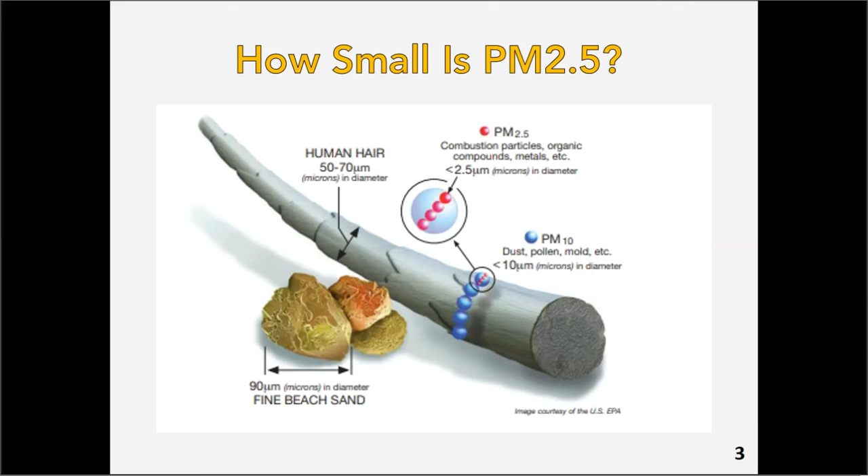Because they're collecting health-related information, that information is considered public. And at some point, it has to be reported to the federal government. Now, I could point you to websites where you can go get that data yourself and take a look and probably fall asleep because it's just numbers.

But the kind folks at the American Lung Association have taken upon themselves to, on an annual basis, tabulate the data in such a way that it makes it easy to see where the problems are. So what they do is they take a look at all the data across the country, and they look specifically at the top 300 metropolitan areas across the country. And each of those areas has air monitoring sites. And every time one of those air monitoring sites gets a reading of a substance that we know is harmful, at a level that we know is bad, that location gets a tick mark. And the more tick marks a location gets, the higher up on the lists that they create it goes.

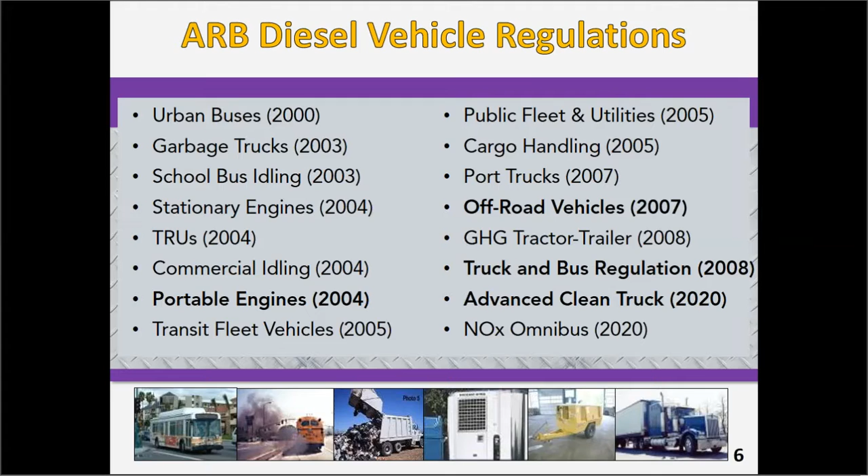Let's get into the main thrust of the first regulation, the truck and bus. And this is, in my opinion, completely time sensitive. We are in the middle of reporting season for the truck and bus regulation. So hopefully some of you are here this afternoon because you want to know more about what you have to report if you're going to report. The truck and bus regulation is what's called an omnibus rule, which means that there were many other rules that were put in place prior to this one that covered different types of use of diesel engines and vehicles.

And the truck and bus regulation was actually created to kind of encapsulate anything that didn't fit into one of the other rules. So it kind of overarchingly covered anything that wasn't already covered. That's why we call it an omnibus rule.

So to understand whether or not it applies to you, you first of all have to be a private or a federal fleet with one or more vehicles. Even one vehicle is considered under this regulation. That's considered a fleet. If you operate that vehicle in California and it runs on any form of diesel fuel and has a gross vehicle weight rating of more than 14,000 pounds, you are most likely in this regulation.

Public and private school buses also fall under this regulation, although they have very specific requirements that we're not going to cover in this afternoon's class. So if you have questions about those, please let me know, or Katie, and we'll get that information for you. The same could be true or said of two-engine street sweepers. By default, they were put into this regulation, even though the nature of that type of vehicle sometimes should put it in a different one. But they're in here. And private utilities.

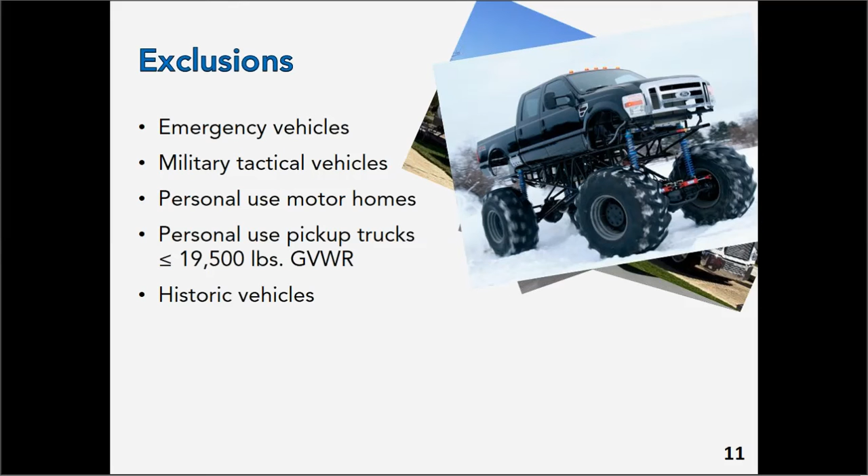And finally, vehicles that are subject to any other in-use regulations. So one of the rules that was on that list that I showed you a few moments ago was the drayage truck regulation. That would be any truck that hauls containers in and out of ports or rail yards. And because they're hauling containers, they fall under a rule that's specific to drayage trucks, because that's what a drayage truck is defined as. So because they're under that regulation, they're not covered by this one. So they're exempt from this one, at least for the time being, but it doesn't mean they're not regulated.

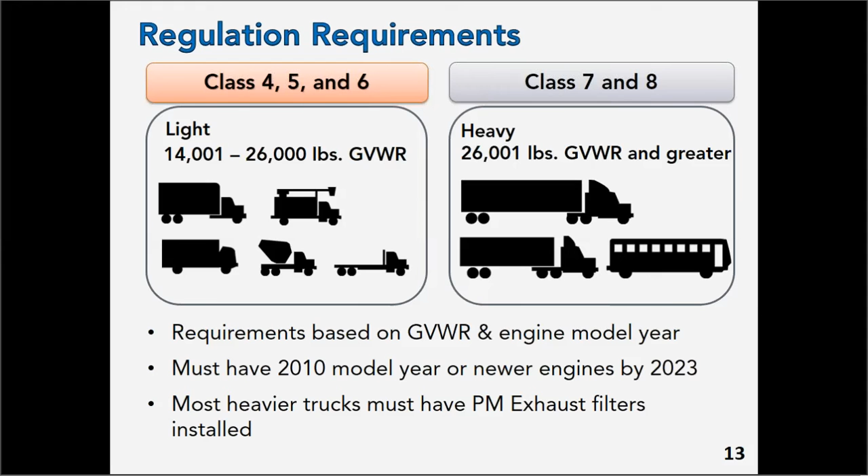A light truck, if you want to go with industry standards, is a class 4, 5, or 6 truck. It's anything that weighs at least 14,001 pounds, but no more than 26,000 pounds. These are your simple box trucks or other type trucks that just aren't giant vehicles. And then the heavy trucks are all the full size, the big semi-tractor rigs that are going to pull trailers, and buses and things like that. Anything over 26,000 pounds. You have to know which size your vehicle is before I can tell you what your requirement is.

The other number that you're going to need to find is also the model year of the engine. The reason we want the model year of the engine is because all engines are certified for sale in the United States by the federal EPA. And on-road engines are certified by model year. So that is how this rule was written, by model year. All the requirements are based on the weight of the truck and what the model year of the engine is. Don't rely upon the model year of the truck, because generally that is going to be the chassis model year and not necessarily the engine's model year.

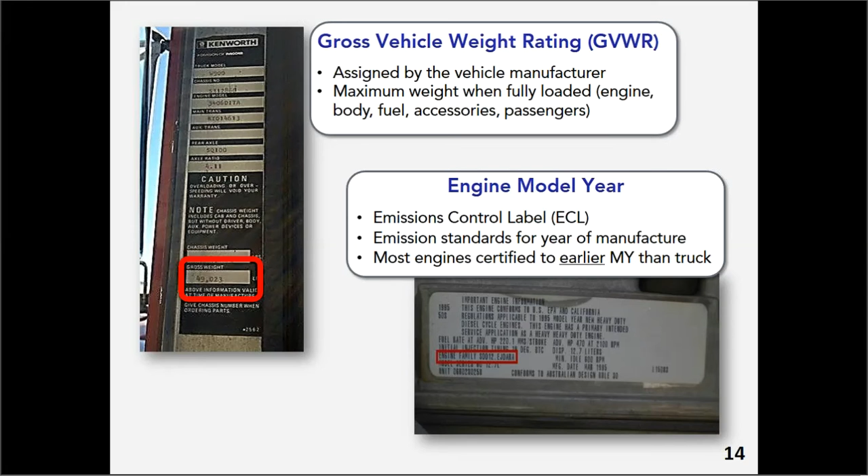Now, since we have the weight class and we have the model year of the engine, I can now tell you what your requirement is. So we'll start with the light vehicles. The light vehicles have an easier to read way to determine what your requirement is, because there's just one requirement. First thing you have to do is find your model year engine. On the left-hand side of this chart, this is for all light trucks, class 4, 5, and 6 under the rule. You find the model year engine on the left, and then a date on the right. That date is when that vehicle's engine has to meet 2010 model year emission standards.

That's confusing for some people because they don't know how you meet 2010 model year emission standards. Well, the only way you can meet 2010 emission standards is with a 2010 or newer engine. There is no retrofit that you can stick on an old engine to make it 2010 compliant. It has to be repowered. So if you have a vehicle in this class and you're up to the date where it has to be swapped out, you either have to repower it to get it to 2010, or retire it, or replace it, or drop it down into low use.

So all those people, perhaps some of you in the audience today, that have these light trucks with a 2004 up to and including 2006 model year engine, on January 1st of this year, you had to have a 2010 or newer engine in that thing. Otherwise, it's not legal to drive in the state of California. So that's the requirement. If you follow this chart, there is no reporting required. You don't have to put your information in our truckers reporting system. Most people do anyway, but you don't have to if you're following this chart. Okay, that was for light vehicles.

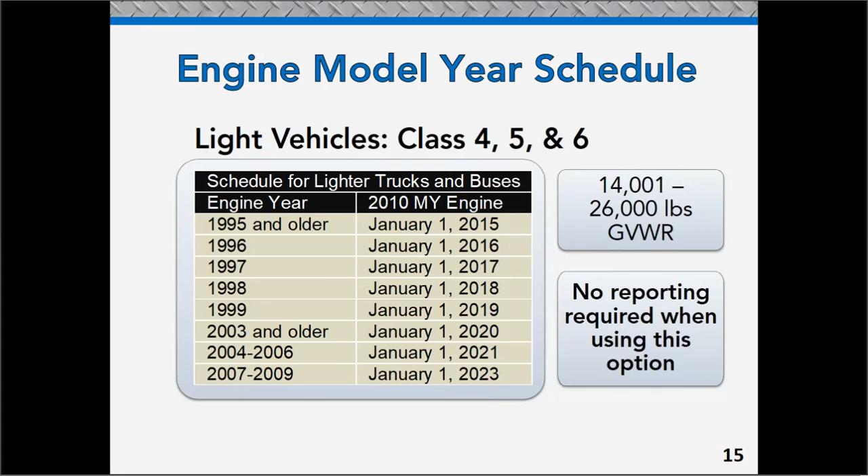Let's take a look at heavy vehicles. It's a very similar chart. There's only one difference, and it's a major difference. In the middle of this chart, there was a requirement to also have a diesel particulate filter installed by a particular date, depending on the model year of your engine. So let's use that same class, the 2000 to 2004 engine model year. If you had a heavy vehicle over 26,000 pounds, class 7 or 8, that had a 2002 engine in it, you were supposed to legally have a filtration system installed by January 1st, 2013, in order to be legal to operate until January 1st of this year.

And then January 1st of this year, even if you had the filter, that engine still has to meet 2010 emission standards. And again, the only way to do that is to repower. So the filter doesn't do you any good by itself. It has to be repowered. If you meet the terms of this regulation, again, there's no reporting required.

For most people, that end date on the right is going to mean one of two things. You're either dropping the vehicle down to a low-use exemption, again, which we'll talk about more later, or you're retiring the vehicle, somehow just getting rid of the vehicle. The repower option is available. Most dealerships will do that service, but it's also an extremely expensive service, and it would probably cost more to do than the engine is actually worth.

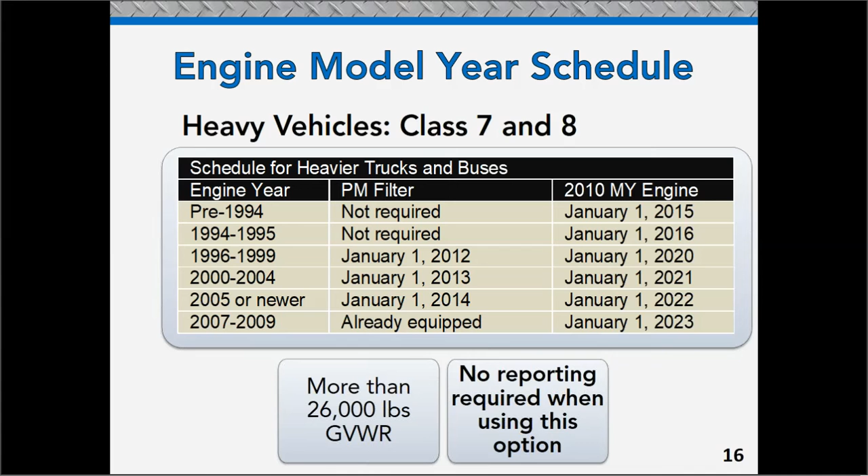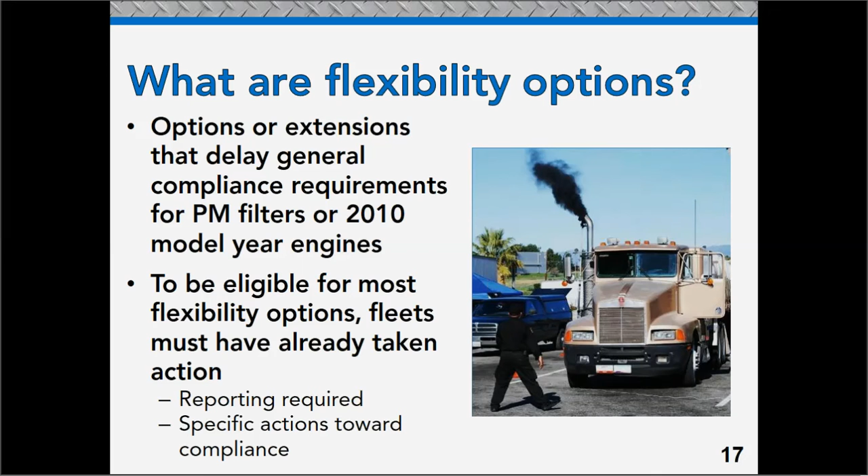Okay, so let's take a look at what's next here. This rule has had a few what are called flexibility options. I hesitate to go too deep into this because most of them are not in existence anymore. We're almost to the point where this rule is fully implemented, but along the way we did have ways for people to basically step outside the boxes I just showed you. They were flexibilities that allowed you to operate longer without filters or longer without converting the engine to 2010 if you met certain conditions.

Now, like I said, most of those have already passed, but we did have a little bit of a hiccup. Back in 2014, under duress from the public and our legislature, the Air Resources Board actually modified the truck and bus rule, and we added some flexibilities. We extended some flexibilities, and we gave people more time and more options. And immediately after we promulgated these changes, we were sued by a company called Lawson Trucking.

Now, Lawson Trucking, in conjunction with the California Trucking Association, filed a lawsuit saying that the changes created an unfair business advantage to the people who didn't have to update their vehicles. And basically the argument was Lawson and CTA's members had already purchased new vehicles, had already put filters on, and they had paid the money to comply with our rule. And then we were giving everybody else a chance to not have to do that.

I agree with that line of thinking, but I also agreed with having the new flexibilities in the rule. But that didn't matter. We got sued and we lost the case. So all the changes that we made in 2014 actually were thrown out. And by filing another legal document contesting that lawsuit, we put off any decision until 2018. And in 2018, the administrative judge came back and told us we'd lost. So the 2014 amendments that we put in place are no more.

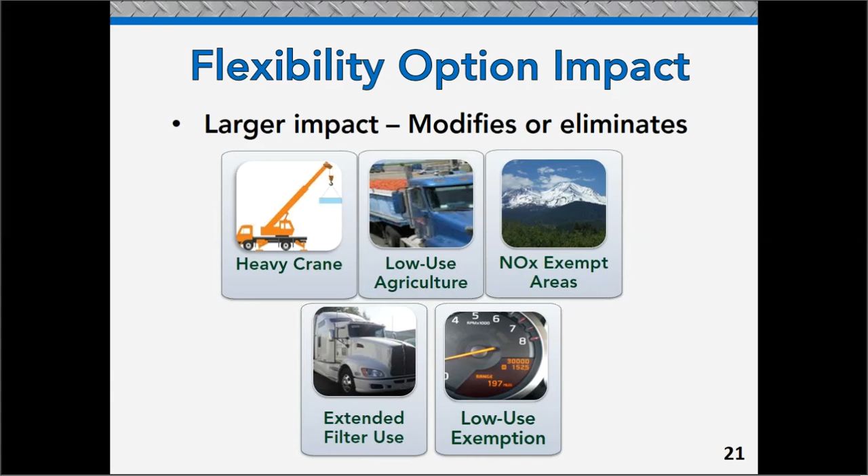For most people, that doesn't have any impact because most people who took advantage of any of the changes we made in 2014 were able to get them and use them because they were ending typically in 2018 anyway. But there are a few things that did change that caused some people a larger impact. And I'm going to talk briefly about these options because there were some changes under the lawsuit, and these options still do exist. First one is heavy cranes.

This was a flexibility option that did not exist prior to the 2014 amendments. And essentially it's for, and I didn't even know what kind of vehicles these were until I read up about this, but these are giant on-road cranes that do nothing but crane work and have to have a certified crane operator run the crane. They don't have any ability to haul cargo. They have to be more than 54,000 pounds gross weight. So these are giant pieces of equipment.

And I know some of you have seen these. If you've ever seen one of those trucks sitting out in the parking lot with a crane extension that goes up 250 feet or something like that, that's a heavy crane, and those vehicles were covered by this flexibility. And then when the lawsuit happened, the flexibility was taken away. So what we did is we installed that flexibility in another completely different regulation. It's now in the solid waste collection vehicle rule.

So the people that were under that flexibility are still following it, and technically they're not in the truck and bus rule, but for all intents and purposes, they are still following the same program. So if you do have a vehicle like this and you believe that it's a heavy crane and you don't know that you're already in the heavy crane option, you need to contact our office, because that vehicle is technically supposed to be in this regardless of whether you wanted it to be in this or not.

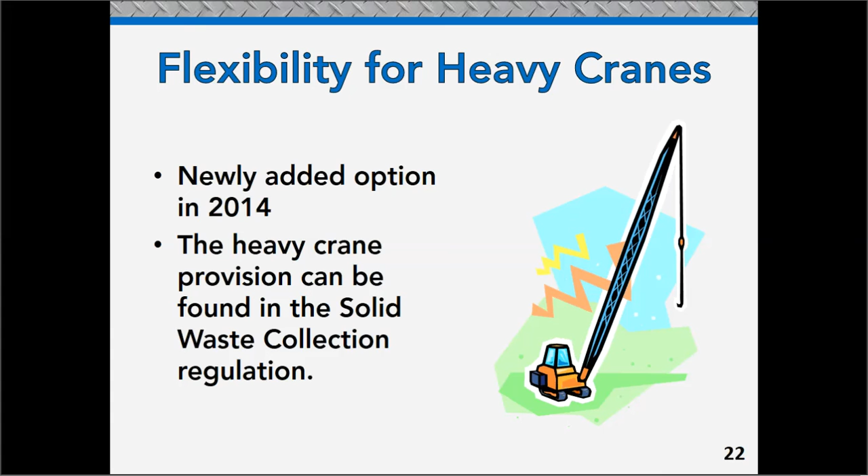Ag vehicles did have a pretty big change because of the lawsuit. When we made the amendments, we gave more mileage and time for the ag operators to run their trucks, and because of the lawsuit basically making those changes invalid, we had a situation where for 1 year, and that was 2019, anybody with trucks under the ag provision actually lost 5,000 miles of operation in 2019. Beyond that, there were no significantly big impacts unless you had cattle trucks, because cattle trucks were put under the 2014 amendments and then taken back out after the lawsuit.

For anybody that's operating ag vehicles right now, you still have the mileage limitation, you still have a reporting requirement, you still have all the options that the provision offers, but your mileage right now is no more than 10,000 miles per year per vehicle, and that ends January 1st of 2023. At that point, you could drop that vehicle down to low use, but your requirement is to ultimately replace the vehicle with one that has a 2010 or newer model year engine.

Here's one that I think is going to be around for a while, at least I hope it will be. When we were putting this rule together, one of the reasons that this rule is in place is because we're trying to meet federal guidelines on different pollutants in our air. One of the pollutants is oxides of nitrogen, which is a component of photochemical smog, or ozone. When we were looking at the data, we saw that several counties in California were actually in compliance with federal standards for NOx. So for those counties, we never really needed any improvement in NOx.

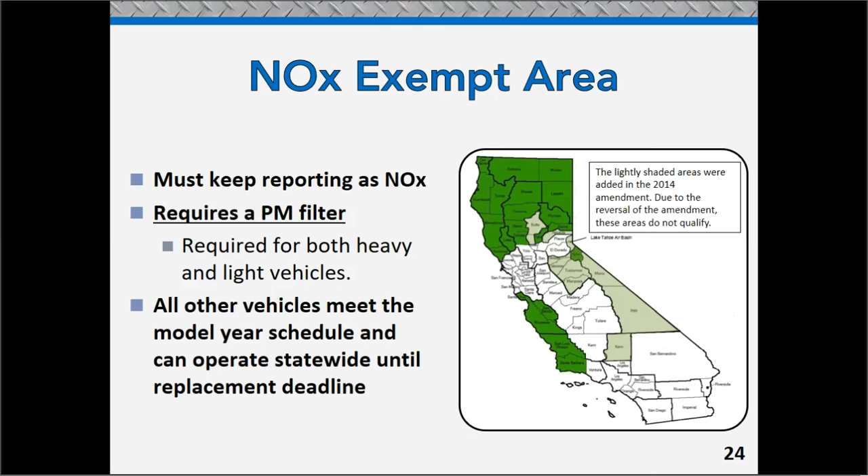But once you get that filter, you're done with having to do anything to the vehicle as long as you own it. You cannot go outside the geographic areas designated by the dark green shaded counties, and there is no mileage limitation. So it's a pretty good option if that's where you live and work. The only reason I put it in this section, and the only reason there are gray shaded counties, is because the 2014 amendments added those counties, and because of the lawsuit, they got taken back out. Anyway, this option is still available. It does not have an end date, so as long as you filter your truck and keep reporting properly, unless something else comes up, you should be able to run that vehicle for an extended period of time.

We also have an issue in the rule with trucks that have problems getting filtration, or trucks that were filtered by a specific date. So there were two things happening here. One was that in the original writing of the rule, we stipulated that any fleet that filtered all of their trucks by January 1st of 2014, we were going to give an extension to all those trucks until 2023. So there's still some of those around.

When we rewrote the rule in 2014, we took away the requirement that it had to be all of your fleet. And again, the lawsuit brought that back. So that's still in the rule. If you are an owner-operator and you own the truck that you had back in 2014 and you put a filter on it, then you should qualify for this extension regardless of the model year of the engine.

You just need to make sure you get a hold of our TRUCRS staff and provide them with the proof that all that's true. The other part of this extended use of filters, or this filter issue, is that there was a provision in the rule that called for a manufacturer's delay, and it's still there.

I don't know why too many people would be putting filters on unless they're doing the low NOx thing, but if you are in the market for putting a filter on and you're worried about meeting the terms of this regulation, what I would suggest that you do is get in process of the installation of the filter by September 1st of the year before you're required to have it.

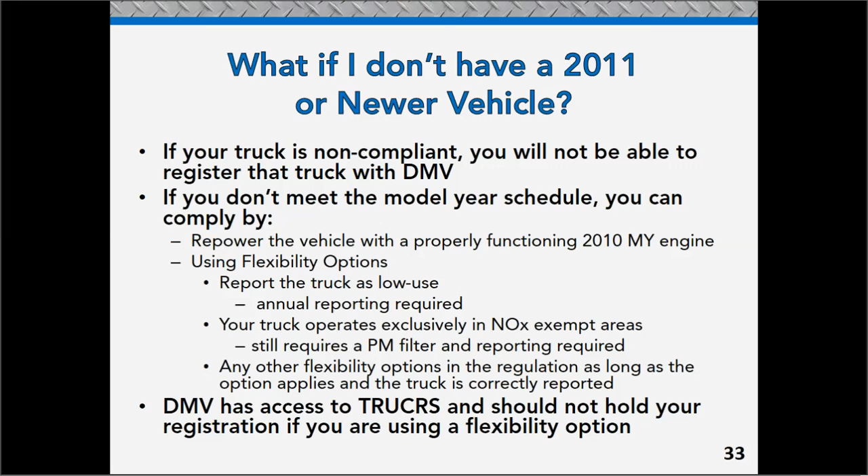Oh, by the way, if you have a vehicle that is 2011 or newer, you're not going to have a problem with this whole SB1 thing, at least not for the time being, because the DMV database will recognize that 2011 or newer truck as having a 2010 or newer engine. And as a consequence, they should not send you notifications that you have a registration issue.

If you do think you have issues, though, we do have some contact information. There's an email and a hotline that you can call. We've got people on call every day during the week who will answer your questions and try and connect you with somebody that can actually work out the issues that you're dealing with.

We also have webpage information for you if you have the desire to go look at more information about each particular regulation. This happens to be the truck and bus regulation webpage, and there's lots of links with lots of information, fact sheets, resources, regulatory documents, all kinds of good stuff. All right, that was the truck and bus rule and the SB1.

Let's talk about PSIP, or Periodic Smoke Inspection Program. First thing you need to be aware of with this is that it is a completely separate rule from any of the other ones. It's been in place for longer than pretty much any diesel on-road truck rule that we have. It was first put in place back in 1998, and it's also what's called an in-use rule.

So briefly to explain that, the truck and bus rule essentially says your model year of this truck has to have this. But the truck and bus rule doesn't say anything about the emissions of the vehicle going forward after you meet the basic terms of compliance. So you've put a filter on the truck, or you have a 2010 engine. What if you're the kind of person that doesn't take care of your vehicles and those engines wind up spewing out a bunch of pollution?

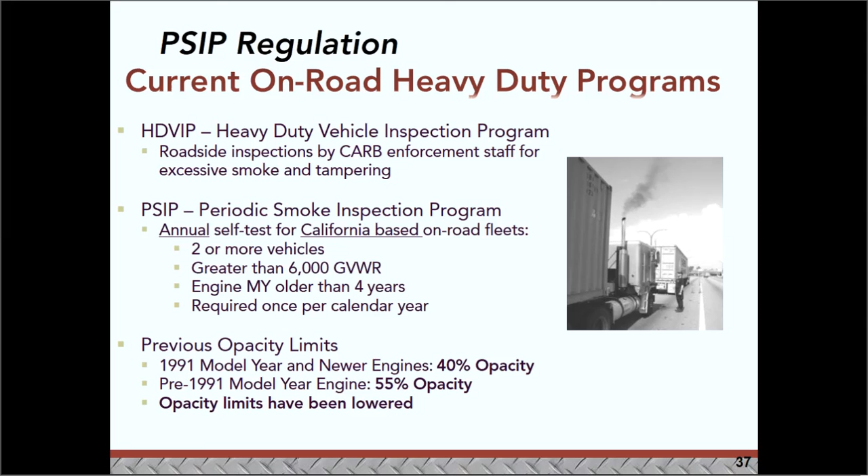But it's simply what's called an opacity test. And opacity is a measurement of the level of black smoke coming from the exhaust. The more black smoke, the higher the opacity. Now, you may be wondering why I'm talking about it now. Well, because this rule's been around so long that when we originally put it in place, we had engines that were putting out a lot of pollution. It was before filtration systems were actually available for most engines, and the opacity levels allowed under the old rule were significantly high. You can see them right there.

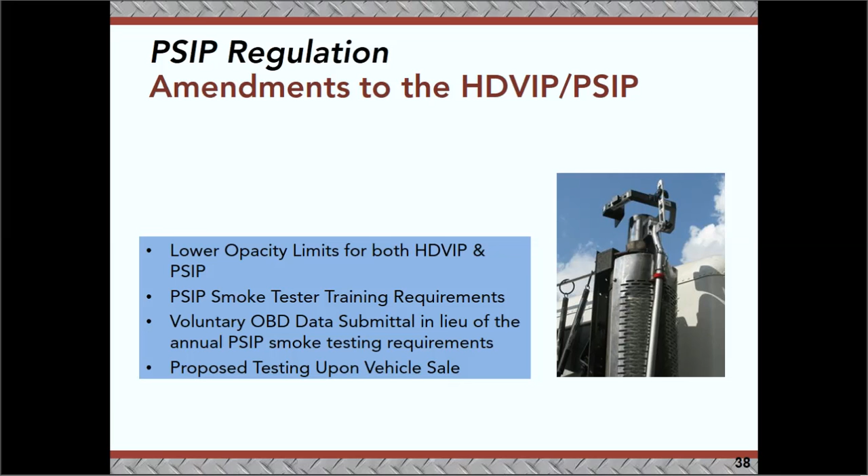We had to lower the opacity levels that were required by this regulation because of the advent of filtration systems. Diesel particulate filters should remove 99.9% of all the soot coming from diesel engines, and so the 40 and 55% opacities just didn't make sense anymore. So we lowered those. While we were getting into the rule, we also added smoke tester training requirements that were not in there before, and created a voluntary program, which I'll talk about in just a moment.

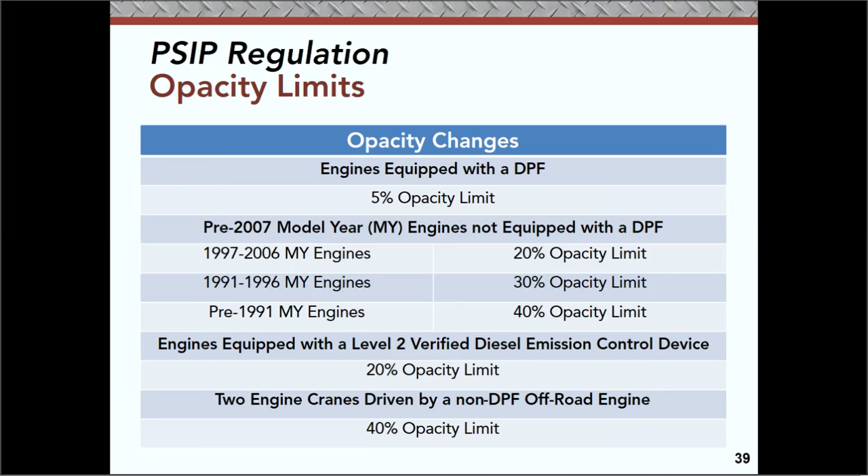So the new opacity levels that are set by this law are shown here. The basic one is this. If you're required to do this test and you test one of your vehicles, the opacity has to be no more than 5% or the vehicle fails, if that vehicle has a filter. If it doesn't have a filter, and that could be your low-use vehicles or ag vehicles that wouldn't necessarily have a filter on them yet or at all, there are still lower opacity levels than there were under the previous regulation, and they're based on the model year of the engine that you have. There are also some specialized pieces of equipment listed here that have trouble getting down to the low opacity level, so they're given a higher level as well.

As far as the training requirements are concerned, there's really two types of people that can conduct this test. One is the owner of the vehicle, if they have the proper equipment to do the test, and the other would be somebody that you hire who has equipment to do the test. If you hire somebody, that smoke tester is required to attend a training class that's held at community colleges throughout the state of California that are part of something called the CDET program. CDET is essentially community colleges that have diesel mechanic schools, and there are 8 of them certified to provide this training. I think there's 1 in Sacramento, 1 in Stockton, 2 in the Bay Area, 2 in the Los Angeles area, and 2 in the San Diego area.

In any case, that person who's charging you to conduct the test is required to have attended a 1-day certification class to actually do that test. With COVID concerns, they have moved that to online training, but they still have to have the training once every 4 years. So if I'm hiring somebody to do this test for me, I'm going to ask them for the certificate from the CDET program and make sure that it is not more than 4 years old. If it is, or they don't have it, it's an invalid test regardless of what kind of equipment they have. So that was one person that can do the test.

The other person that can do the test is either the owner of the truck or somebody that works for their fleet. We're not requiring that person to go to the CDET training program, but there is now an online training class that anybody conducting a test on their own vehicles or their own fleet is required to have taken. It is a couple hours. It's online. It's menu driven. You watch these little videos, you answer some questions, and as long as you get a 70% or better through all the modules, you pass, and you will be sent a certificate as well as a tester number that has to be entered into the testing device.

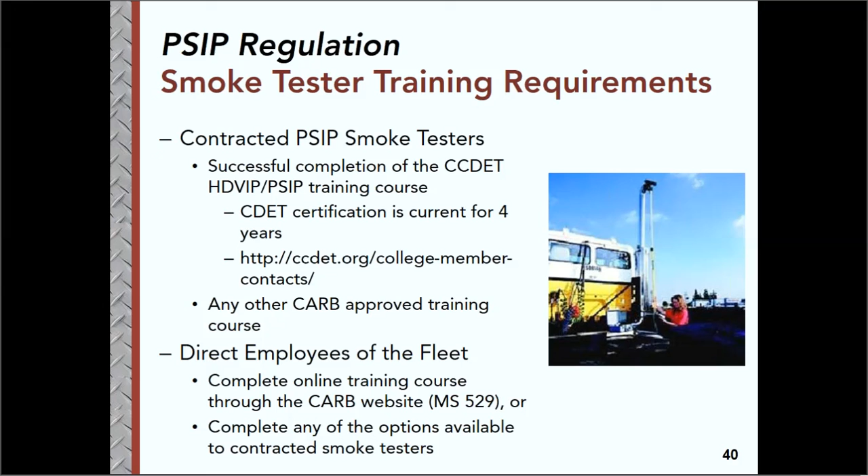The record keeping and reporting requirements really haven't changed, especially the record keeping requirements. It's always been you have to retain records of these opacity tests for 2 years. And as long as you do that, we don't have a reporting system for those opacity records. The only time that ARB personnel want to see them is if we're auditing your

fleet for some reason. So if we're auditing your fleet to try and get you into the truck and bus rule as a low-use vehicle or ag vehicle or whatever the case is, then we're probably going to ask you for current opacity readings. If you're under audit from our enforcement division, they're going to want to see 2 years worth of opacity readings for the vehicles that are in the fleets, and that's what it was before.

We did add an additional voluntary choice for people who have newer vehicles. So anybody that has trucks that fall under this rule where the engines are 2013 model year and newer, those vehicles are equipped with something called onboard diagnostics, or OBD. Basically, it's the computer system that your vehicles have run on for a long time, except now it's in the heavy-duty vehicle class. These vehicles are capable of having smog inspections done to them because there's a little dongle underneath the steering column that the computer can attach to.

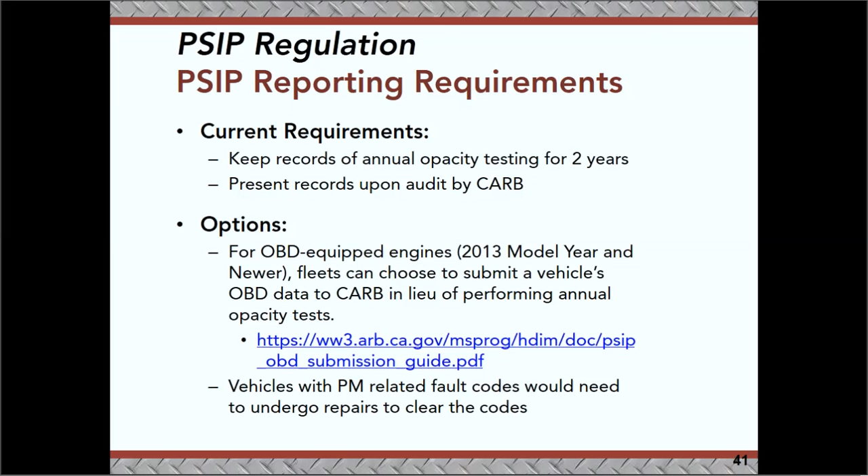I also need to let you know that we're in the process of putting together a new type of smog inspection. So right now it's actually passed, but we're working on the details of how to actually do what's called an inspection and maintenance program on heavy-duty diesel vehicles. If you don't know what inspection and maintenance means, the quick and dirty for that is smog check. Right now you have an inspection and maintenance program for your gasoline vehicles throughout the state of California. That is a smog check.

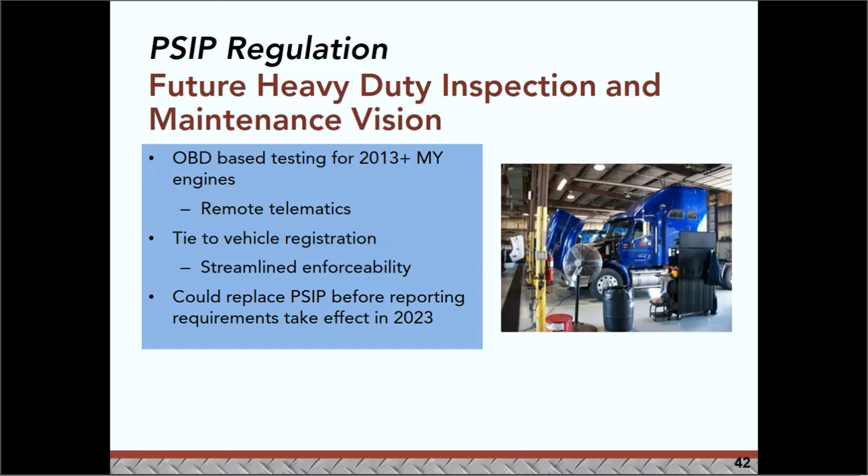There will be one in short order for diesel vehicles. It should be fully instituted sometime in 2023. So look for that to happen. And when that happens, the PSIP test is probably going to go away for most people because you're going to be part of this new I/M program.

All right. So before I turn this over to Katie, I do want to talk about the newest stuff. Everything I've hit so far has been part of the older style of regulations, all dealing with combustion vehicles and combustion technology. In the state of California, as I showed you very early, we have such a problem with pollutants. We are transitioning to mostly electric or hybrid electric or zero emission type vehicles. In that vein, we have actually passed 2 different regulations already that are going that direction.

The first was something called the Advanced Clean Trucks, and it was more of a regulation to gather information than anything else, and I'll talk a little bit about that. And shortly thereafter, we passed something called the Low NOx Omnibus, which is going to make sure that the combustion vehicles run as low NOx as possible. The next regulation after the Low NOx Omnibus is going to be zero emission fleet type rules, which are going to require the transitioning of diesel vehicles and gas vehicles to zero emission.

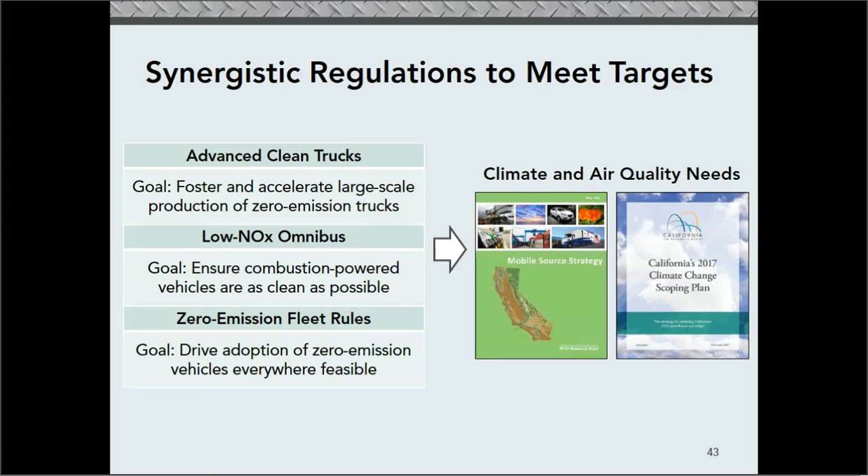For the Advanced Clean Trucks summary, it had 2 basic elements. The first element was a sales requirement for the manufacturers of vehicles sold in these weight classes in the state of California. The second, and it's actually going to come up first, was large entity reporting. So there's a one-time reporting requirement for any vehicles, facilities, contracted vehicles, if you contract vehicle services, and this applies to larger companies as well as all government agencies.

The requirement is actually supposed to be April of 2021. So we're 4 months away from when this thing is supposed to actually happen. And if you don't know that that's there, Katie and I, or Katie more than me, are working on a training program for the reporting component of this. And